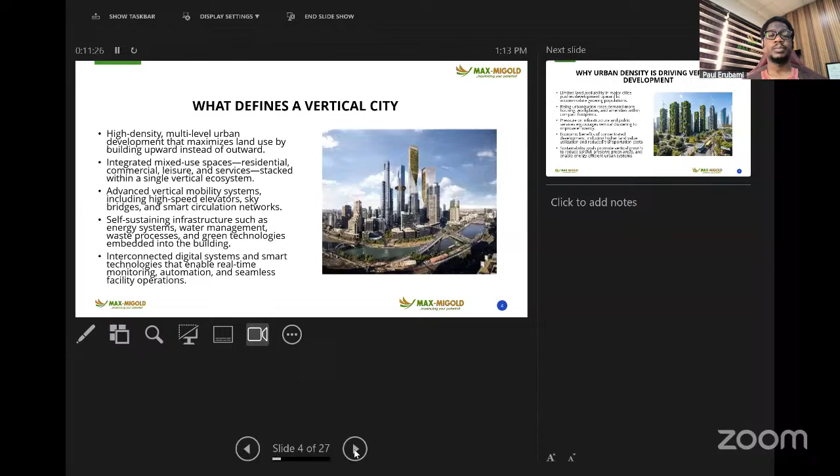They really need to talk so much about why this vertical development is being forced on us by urban density. There's been a mass migration from rural areas to urban centers. The land sizes of the urban centers are not going to expand because more people have come in. So that's the major driver. Land availability is limited. And so why don't we use the spaces above the land and create multiple levels above so we can accommodate these migratory populations that are coming into the cities.

And as urban cities expand and increase in numbers, workplaces have to match. In fact, the existence of workplaces is one of the major drivers of people moving from rural to urban areas. And then other amenities to take care of this population, hospitals, schools, police stations, and all that will have to be built as well. And so we see ourselves being concentrated massively in these urban centers. And so we just have to find ways to build in such a way that we can stack people up for all kinds of activities and use of vertical spaces.

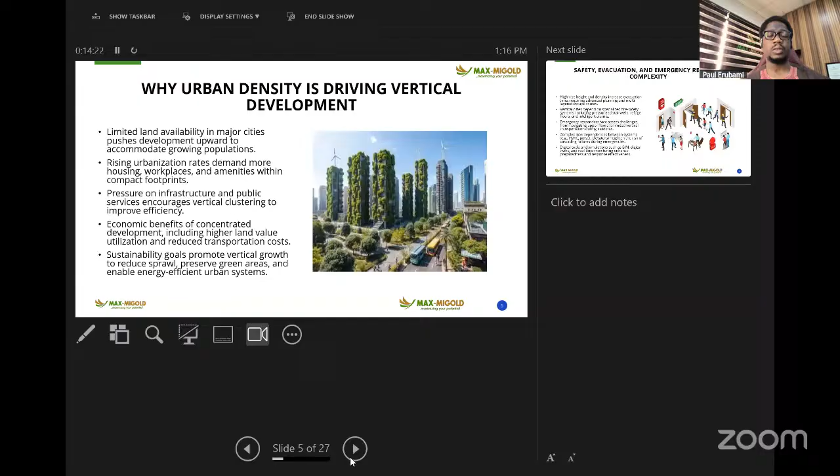But then the complication starts. If you have 500 buildings in an estate and there is an emergency, the emergency will probably be in one corner or one spot or one building or the other. And people will easily find their way out to a muster point and to safety from different parts of the land.

But if you have those 500 buildings stacked up in one 30 or 40 story high-rise, then what you have done is create a stack-up of people, and the exits are still going to be at the bottom. Everybody has to find their way to that bottom to exit the building. So it becomes a huge safety risk. So when it comes to evacuation and emergency response, you have a very, very complex situation to deal with. Very recently, we saw horrifying videos of people trying to jump off many floors to safety, and many to their deaths, during the fire that broke out at the UBA house in Marina.

We don't pray for such occurrence to happen again. But then we have to just face the reality that there should be forward proactive thinking on how high rises are used. Their height and density increase evacuation time, requiring advanced planning and multi-layered escape routes.

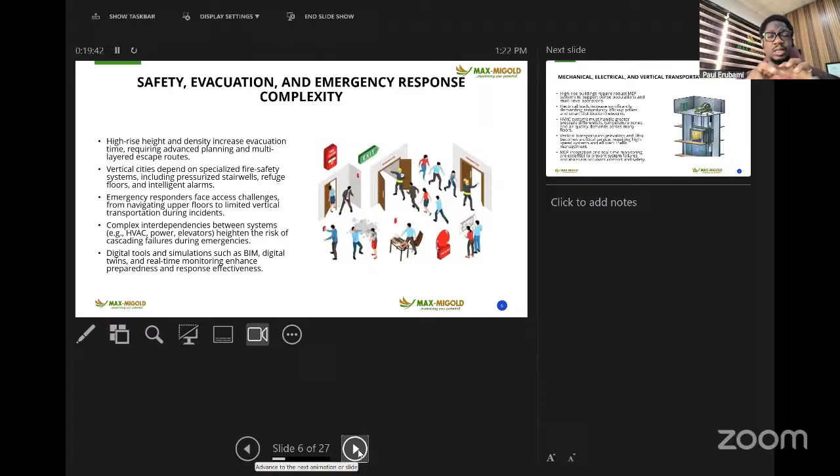If you have digital systems built in, like BIM, building information modeling, and digital twins that help you to immediately share advanced, detailed information with responders, it will help in their approach to the building to solve any emergency they are there to intervene about.

Let's talk about mechanical, electrical, and vertical transportation demands. High-rise buildings require robust MEP systems to support dense populations and multi-level operations. So you have all these rooms, people pouring out into the elevator lobbies to use the elevator. So the elevator is always working. The loads on the electrical system increase significantly.

Every time you push that button and you go into an elevator, a massive motor activates to either lower you or take you up. And that moment that motor is activated, a strong draw of energy from your electrical or power supply takes place. And then the air conditioning system must handle greater pressure differentials, temperature zones, and air quality demands across many floors.

So whether you are using the VRV, VRF systems or the chiller central cooling system, there will be refrigerant moving across distances, chilled water moving across distances, and air handling units blasting fans to circulate this air across distances. And then, of course, your lifts and elevators. So when you're looking for critical systems in a high rise, lifts and elevators are one of the most critical systems. It's important that we now have a way to monitor all of this. It's no longer business as usual.

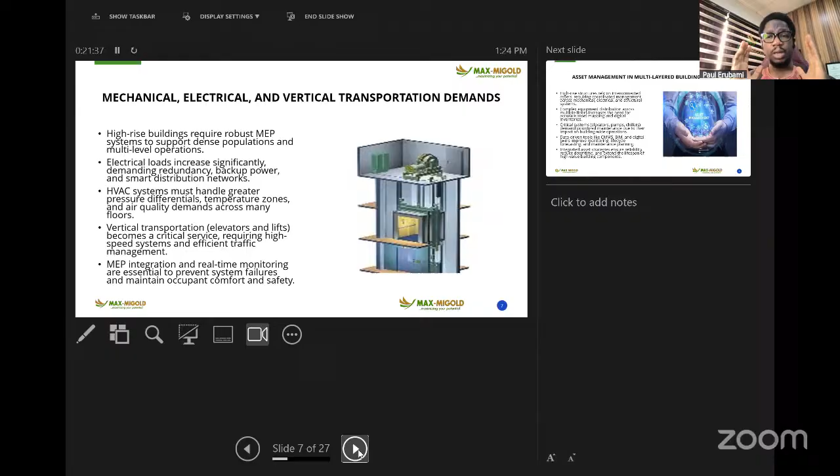If you have a 4 or 5 story building and you put a lift there, you probably won't even monitor how that lift works. But if you have a 40, 50 floor building, the elevators have to be monitored very closely, because even the slightest vibration or sound or temperature spike in any of its mechanism should trigger an action from you as a facility manager.

So not being aware of such predictive data is not an excuse. You really can't say, oh, well, I wasn't aware until something happened. You need to be ahead of that predictive situation. And because all of the assets are interconnected, facility management has to be a very seriously coordinated effort.

The equipment that are built into high-rise buildings are also very sophisticated. It's not something that anybody can just wake up and start managing. You need to have very deep knowledge of the systems that you are managing. And so picking technicians who have, for example, managed small systems, not sophisticated, and bringing them in there without giving them proper training is a disaster waiting to happen. Because the mindset, the philosophy, the way of thinking has to be adjusted to the complexity of the environment you are bringing them into. So they may not come cheap.

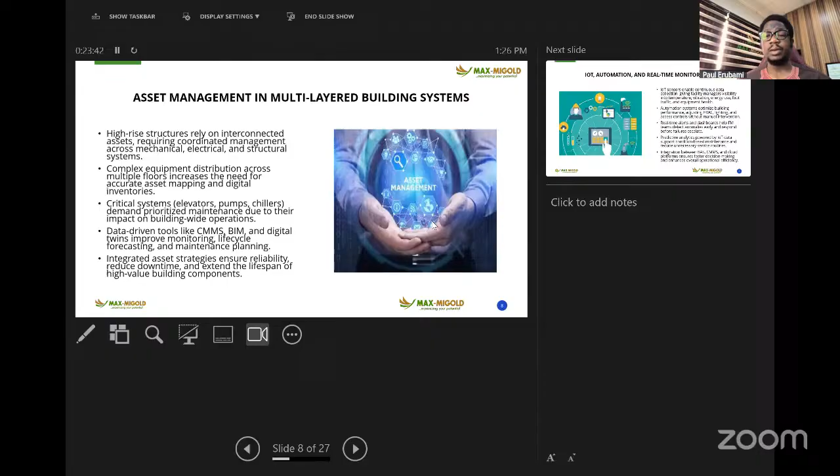And as facility managers, we tend to work with client budgets, economic considerations when taking decisions around should we follow strictly the OEM recommended PPM schedule, requirements for oils and greases to be a certain specification. Can we manage? Can we find a way to cut corners and still please the client's budget while getting our jobs done? When it comes to high-rise buildings, we can't. You really don't have that leverage because the risk becomes too high.

You need to up your game to the point where you can do everything as recommended with precision in such facilities. Because at the end of the day, you are keeping records, and those records are going to vindicate you if something happens. If something happens and you have been strictly following the regimen of maintenance activities prescribed by the OEMs that supply them, then you will be free.

But if you've played along, allowed some things not to be done, tried to look for alternative cheap options, you're putting everybody's lives at risk. And that is not something that any system or government wants to excuse. So we don't want to be at that point where the investigations will now lead to indicting us for not being meticulous. We have a duty of care to protect the lives and the assets of investors in high-rise buildings.

So let's talk about IoT, automation, and real-time monitoring. These IoT, Internet of Things sensors, are connected to virtually every aspect of the facility, from your lights to the devices that pick up ambient temperatures from all spaces, crawl spaces, electrical panels, humidity levels, because some of these things are not things that you can easily just observe because you are there. So humidity levels in crawl spaces, in open spaces, you need to pick them up because they affect the operating parameters of the equipment and assets you have installed.

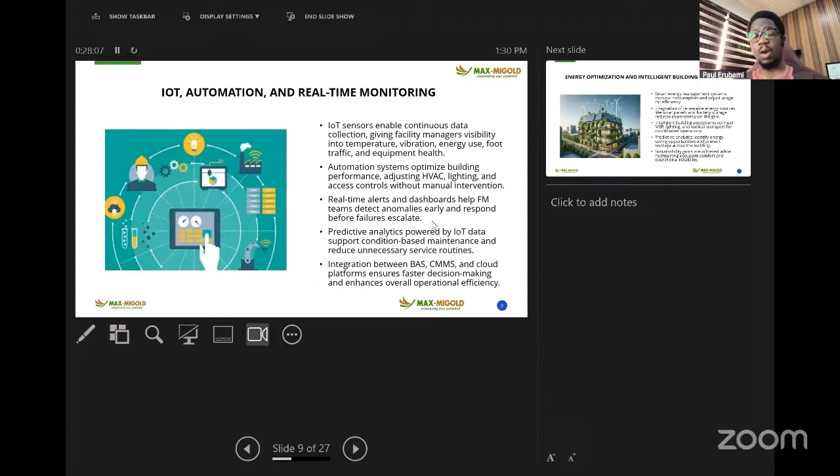These are all automations that help to reduce energy consumption. They help to increase comfort of the end users. They work to extend the life of the assets by preventing any overwork or any excessive wear and tear. And also they are massive in energy cost reduction. So you have your facility now optimized because of these automations that are built in.

Before now, if you needed an automation built into your high rise, you deploy a building management system, you deploy all kinds of sensors interconnected to a mainframe computer, and then you have visibility into all of this. And the cost used to be very high, but now you can deploy smart sockets and smart switches that can be integrated into an application like ThingsBoard or Home Assistant. You can deploy sensors, stick them all over the place, and most of them are even wireless, so that you don't have to run complex wiring across the facility.

And once you install them all over the place, you can now have visibility from a central interface. Once they're all integrated, you can see what is happening across your facility. You can actually manage facilities without being there. And then for the energy efficiency we talked about, you can monitor consumption of energy to the smallest units.

You can tell how much a laptop as small as this is consuming, because the socket that the laptop is plugged into is a smart socket. It has automatic controls that can go off and on. It has metering functionality that can tell how many watts or amperage I'm consuming as I'm plugged into it. I can see for every light, for every air conditioning, for every water dispenser, printer, server that I install, I can see exactly what each one is consuming.

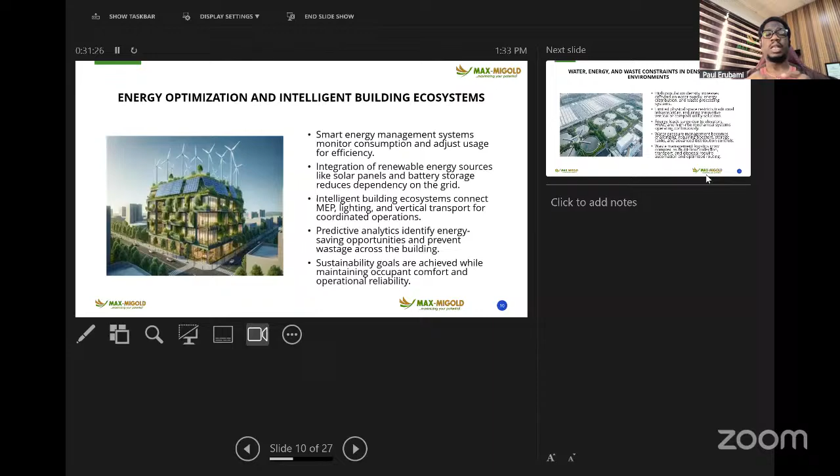And so when we start talking about sustainability, when organizations mature to that point, you move from basic survival through resilience and then sustainability, and you're moving into smart. You now need to have data with which you can show that you are becoming more and more sustainable. You now need to have data to show how you are reducing your water use, your energy use, your material resources, and reducing your carbon footprint on the environment. All of this just comes because you've developed a network of smart systems through digitization in your facility.

High population density also increases demand on water supply, energy distribution, and waste processing systems. Because we don't have that space to put in equipment, treatment plants, sewage plants, all over the land, they now have to be integrated. They will still do the same work for a very complex number of people, because if you have 5,000 people in one building, the waste refuse will be the same volume, the sewage will be the same volume, cooling requirement, water use, energy use will still be the same, but then you now have limited space to pack all this infrastructure in the basement and certain floors within the building.

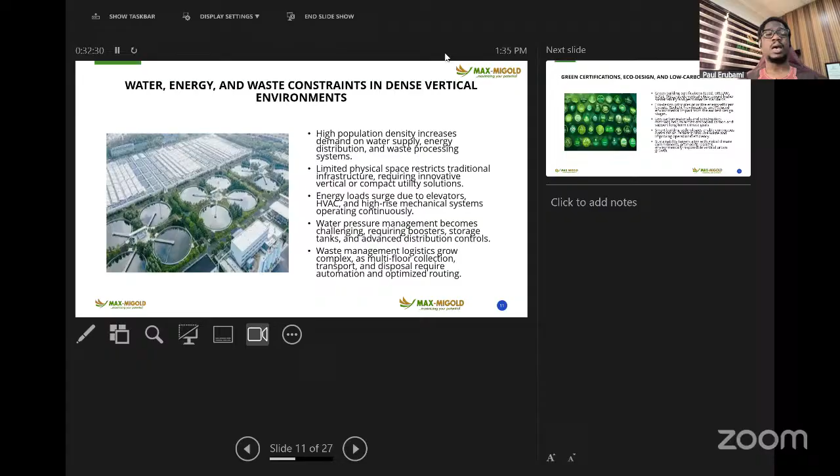And as people are more concentrated in that little space, at certain times you have a huge spike in energy demand. For example, in the morning, people are getting ready to go to work. You see that massive spike. You have to account for it. You have to provide for it in the design and deployment of transformers and generators, for example. And then you see the lows. You can actually predict and negotiate for energy purchase deals using the highs and lows of these densely populated infrastructure systems that we built into the high-rise buildings.

They also give us the advantage of easy certifications. If you want to certify an estate that is sprawling, you have to go building by building. There's all that thermal influence, there's water penetration, there are all kinds of interactions. But a high rise, a compact facility with all the data and sensors already built into it, can easily establish itself as a low carbon facility, because it is the intensity that is measured: energy use per person, water use per person, waste generated per person, because you can easily control and reduce it through these complex systems you built in.

You can have the data to prove certification, and that's always the big win for developers, facility managers, and those who are managing such properties, because once you're able to get those green certifications, it's easy to charge a premium. Your end users tend to have low costs. There's a prestige for living or working in such an environment where there is a high level of sustainability accreditation or certification, which gives you both short-term and long-term value as a subscriber, owner, or tenant in such a place.

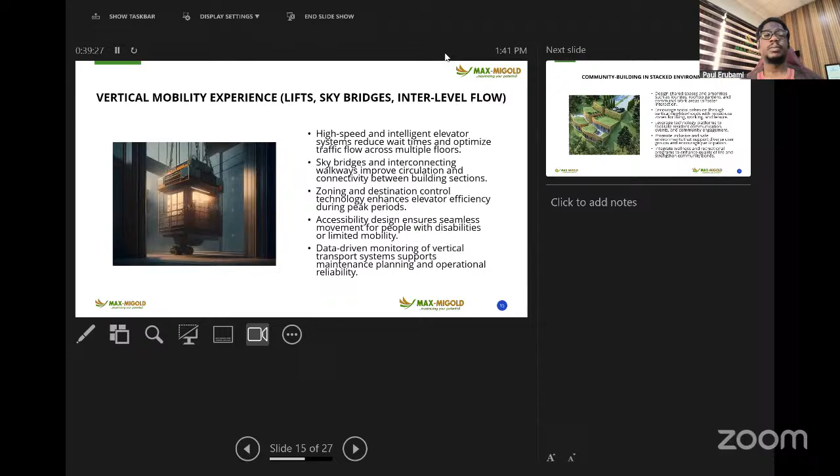And when you are in a stacked environment, it's important that you form some kind of community, encourage social cohesion, because if you stay isolated in one little box within that high rise with so many people around you that you can't talk to or interact with, it makes you unwell. It makes you unable to feel free or feel healthy in the environment. So that interaction needs to be created. So we need to create social spaces, lounges, gyms, work areas, swimming pools, just basically encourage people to come out and interact one with another.

Now, this issue of security, access control and security for high rise. If you expose a high rise to a security threat, it's one strike with too many people involved, right? So you need to have complex access points across floors and zones, which require layers of security protocols and identity verification. So you have card systems for accessing elevators, for opening certain doors, ensuring that visitors have access only to the floor they have been booked for. You give them a card to ensure they can't just mill around the whole place and create nuisance. Real-time communication between security teams for rapid response to incidents, balancing security with occupant convenience and privacy to maintain a functional and welcome environment.

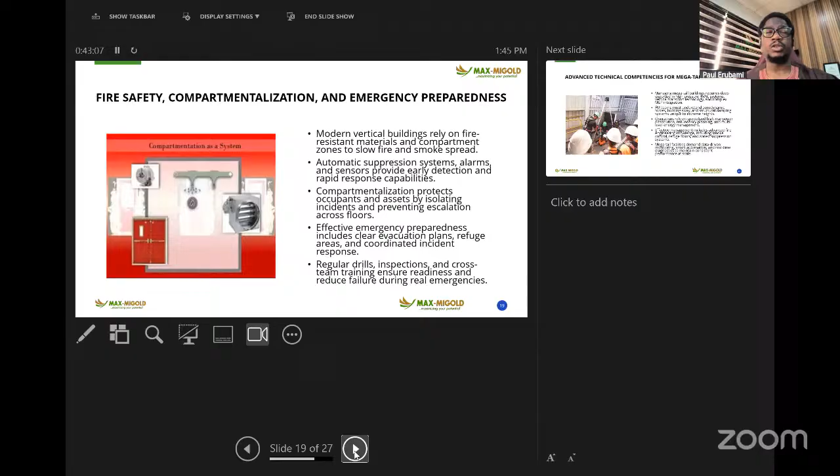I've talked about this. The doors have to be fire rated, for example. If there's fire in one section, it should be able to hold that fire within that section instead of allowing it to spread through the whole building. So the choice of materials for doors, windows, claddings in high-rise buildings should be fire resistant materials. Even paints nowadays are available as fire resistant paint materials. And then setting fire suppression systems built into the area. So you have FM 200 in some areas, you have fire extinguishers everywhere, you have hose reels, you have sprinklers built across the building, just to ensure that if something happens, it's not only contained, but it's brought down and mitigated as quickly as possible.

And then the teams that are going to manage these tall buildings need to be specially trained. Sometimes when it's time to mobilize to manage a high-rise building, we tend to be in a hurry. We tend to just pick people off the streets and expect that they will learn on the job. We need to have structured training programs after going through rigorous recruitment procedures to ensure that they don't just know how to operate the equipment and assets, but they understand the working ideology or philosophy behind those equipment, so that they can take sharp, quick decisions in the case of emergency.

They should understand why certain switches are in on position during rest and why certain are in off position during rest. They should understand the workings, the dynamics of every equipment they are managing and why they are told to do certain things. So you must go beyond this is a maintenance plan to take them through maintenance strategy, understand why those things that are in the plans are the way they are.

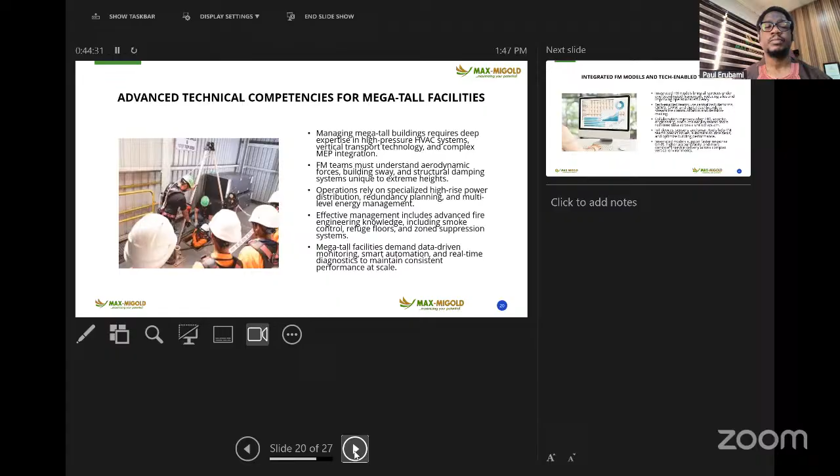And now with software, if you have all of those sensors, you now have a computerized maintenance management system or computer-aided facility management system where all of that data comes into. You have automation set up so that certain things are acting on their own, but the information is still coming into that dashboard. It gives you visibility, it gives you historical awareness, and also helps you to plan ahead to fine-tune certain settings in the building to ensure that you don't have any risk or things don't go out of control.

Data-driven decision-making for complex vertical systems. Vertical cities generate massive operational data, enabling FM teams to understand system behavior and make informed decisions rather than relying on guesswork. So real-time data from lifts, power systems, air conditioning systems, sensors that pick up all kinds of ambient parameters, control systems that switch things on and off, reduce and increase based on information gotten from the sensors.

They all put down a set of data for every activity, for every on-off, for every switching activity, every control activity, there's data. For every minute that passes, there's energy consumption data, there's sensor data. All of this helps us to see ahead of what's going to happen. So if you have equipment running at temperatures or energy use above their ratings, it is an indicator of a problem. So if you see such a thing, you want to step in and act before anything goes wrong. And then with all that data, now with AI, there can be automatic fine-tuning.

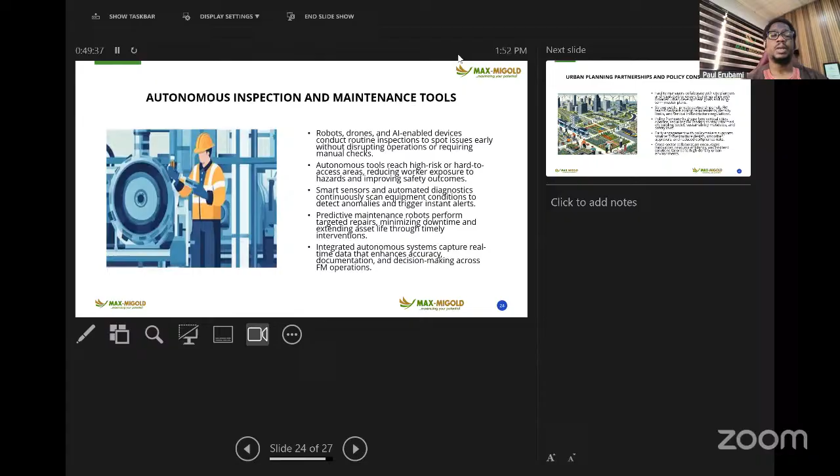With technology, that vibration can be picked up and analyzed against the previous readings that have been acquired, analyzed against what is going to happen next, and it can tell you that in the next few hours you're going to have issues with this pump. So you don't run out. Nothing comes to you anymore as a surprise when you have adopted a significant investment in technology.

And the cost to deploy technology compared to the risk of having so many people packed into one building, I would say go for that technology, go for that automation. That investment is always going to be worth its weight in gold when done right.

And then, high-rise buildings cannot be in isolation. If you put up a high-rise building today and you expect to connect to the national grid, for example, you have to have collaborative planning with the distribution companies to ensure that adequate preparation can be made to give you enough power. And they have to be ready to expand their systems and run new lines. For example, you need a 33 kV line to your facility from a distance that they had not thought of implementing before the siting of that facility. They have to make such investment.

They want to serve you, but you have to give them information. They have to be able to plan to be able to serve you right. Facility managers collaborate with city planners and regulators to ensure buildings align with broader urban development goals and long-term master plans. And that's why you must also get approvals.